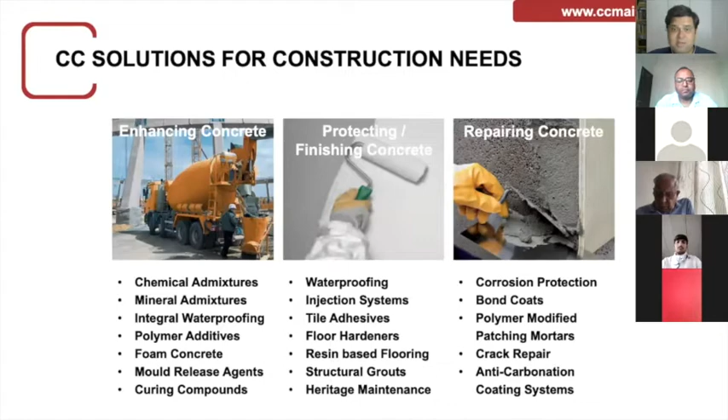As a construction chemical industry, most of you are well aware with us. We have a lot of different solutions in enhancing concrete, protecting concrete, finishing and repairing concrete, and so on—everything from admixtures to waterproofing systems, repair systems, corrosion protection, bond coats, grouts, tiling systems, you name it. Like we say, the aim is to make construction better.

Here are a couple of slides about our aims and objectives. What we are looking to do is basically address common issues relating to commerce and industry, especially relating to our industry. Education is one important part of it, along with promoting the growth of the CC industry, as well as providing a forum to communicate with different government bodies and other technical bodies such as BIS and other codal and professional bodies. This is all to make construction better.

We also work to organize workshops, conferences, and lectures, because knowledge sharing has to go on. The correct kind of training has to be imparted, with continuous education for both our customers and our members. So we look at both sides of information exchange over time.

Another key aspect is that we want to regulate the conduct and code of practice in the industry—basically increase the quality levels throughout the industry. These web talks would be one of our engaging mediums to do something like that.

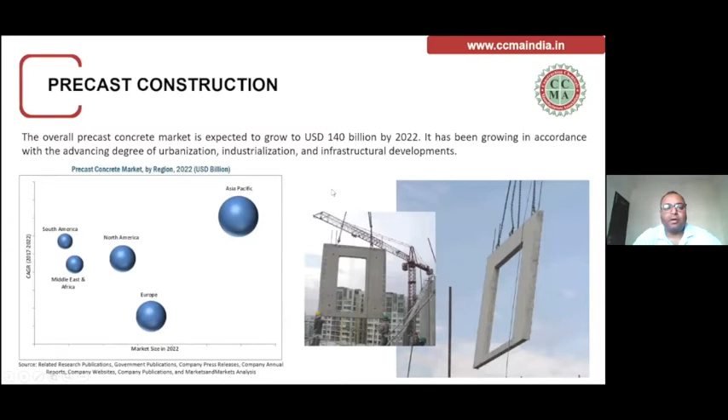For precast, we have a lot of construction going on, like building constructions, bridges, culverts, pipes, wind towers, various kinds of retaining walls, railway sleepers, tunnel linings like metros and all. You see a lot of tunnel linings are there. Various kinds of storage tanks are being constructed with precast. So precast is a big industry.

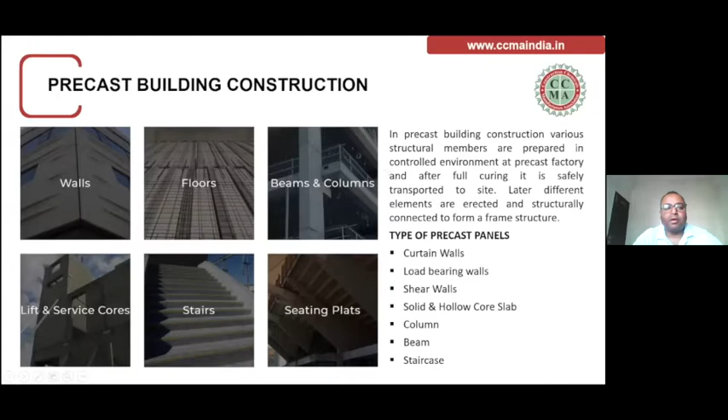We would be talking about building construction today and the grout requirements and sealant requirements. In precast construction, we have various members like walls, floors, columns and beams. These members are constructed in a factory, and then transported to the site location.

You can see these photographs, wherein these big panels are constructed in a very controlled environment in the factory, and then post construction or post curing, it is transported to the new site location.

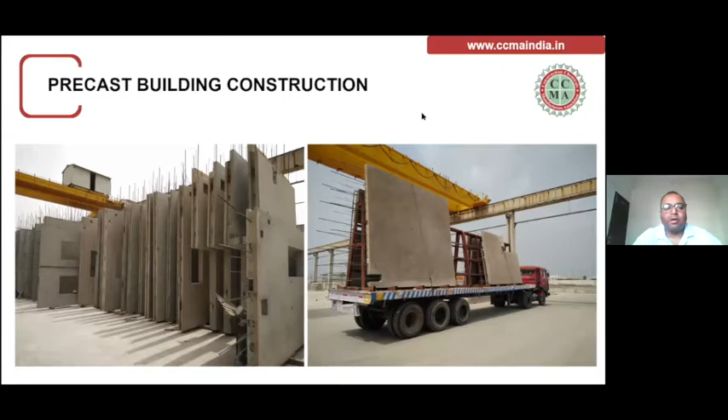At site, we have big capital equipment to handle these big panels, big cranes. Tower cranes are required, and skilled manpower is required for handling these panels and erecting them to the right locations. Once the panels are erected, a support function is provided, like bracings.

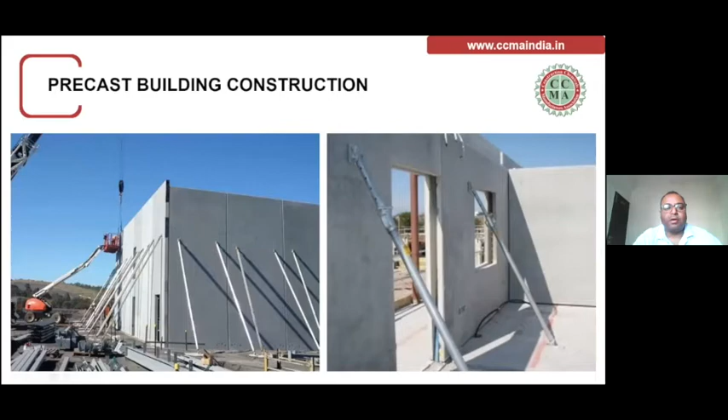And then you can see the joints. All the joints are connected together because all these panels are independent. They have been placed with the help of cranes. The bracing has been done so that they are in position until construction, and then the joints are fixed.

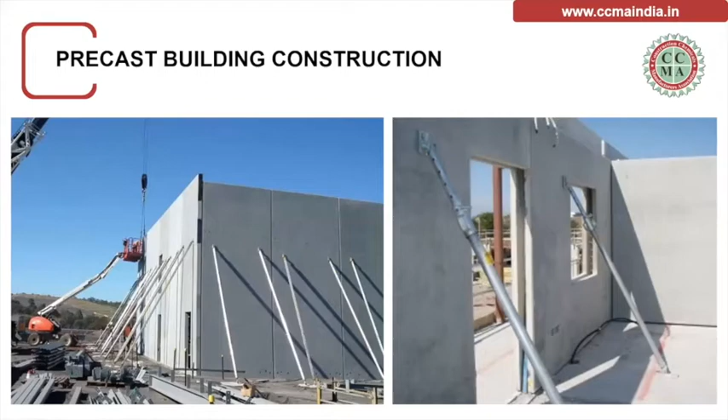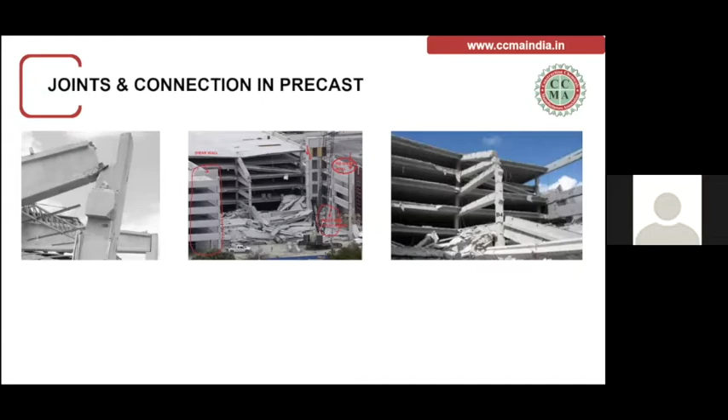There are various codes available. One of the codes is ACI 550, which provides the guide for emulating cast-in-place detailing for seismic design of precast concrete structures. This emulating detailing is basically defined as the connections between precast members, so that the structural performance of these joints is equivalent to conventionally designed cast-in-situ or monolithic structures.

This is very important, that these panels are erected separately but are connected, and the expectation from the joints is that they give similar or better performance compared to the cast-in-situ structure or monolithic concrete structure.

These connections between precast elements are done either by bolting, welding, or grouting, depending on the type of structure and criteria like seismic zones. It's important to understand that joints and connections are two different things in precast structures. Joints are basically the designed gap between the members.

The members are arranged so they are connected to each other, but the main function of joints is that one member should not transfer load to the other member. There is just a physical separation between the joints, created by sealants. But connections are designed to transmit force. For example, in a frame structure with column, beam, and slab, load transfers from slab to beam, beam to column, and column to foundation. These are load transfer members, and the joints between them are called connections.

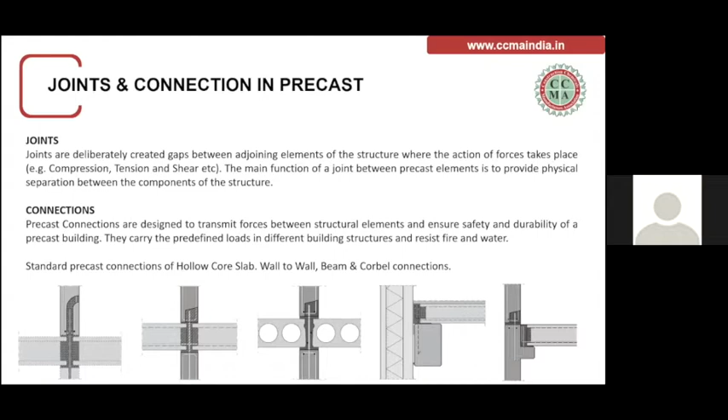There are various kinds of connections. For example, in the bottom sketch, the hollow core slab is connected to walls, beam, or corbel, and these connections are grouted at a later stage.

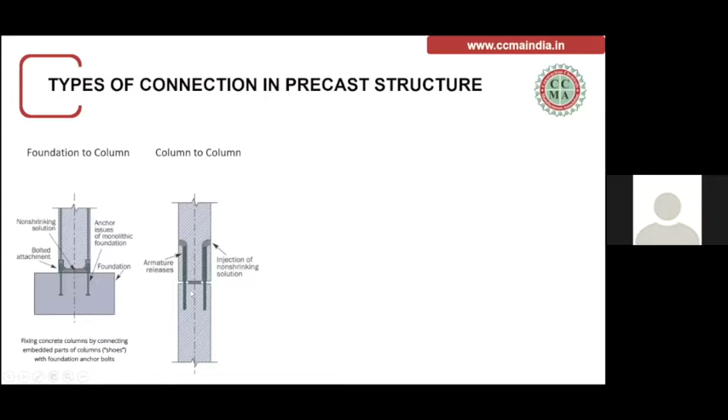These connections occur at many locations, like foundation to column. You can see the foundation here, and on top we have the precast column connected with non-shrink grout. Then column to column, where one column is erected and another is placed on top, with connecting rebars and preformed ports for injecting non-shrink grout. Similarly, there are column to beam connections, beam to slab connections, and slab to staircase connections. These are the various members in precast structures which are connected to each other, and we call them connections.

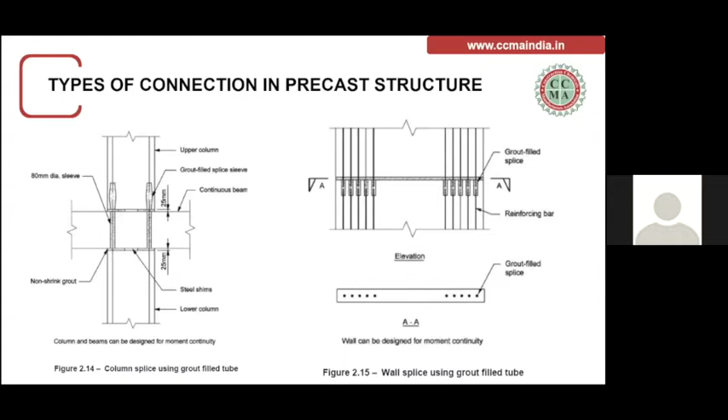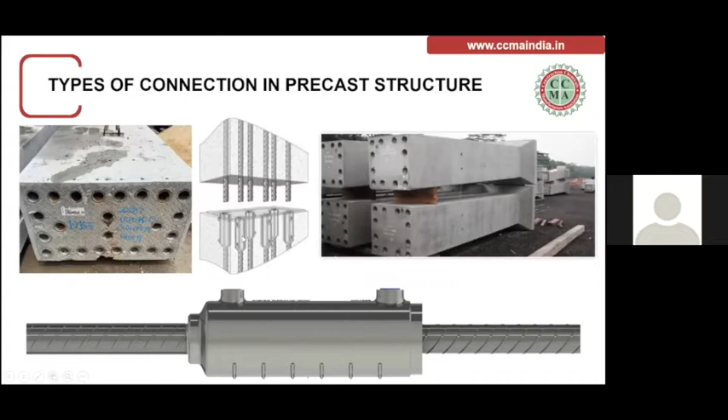To explain this, I have taken a small video which will give you a clear picture of how this works.

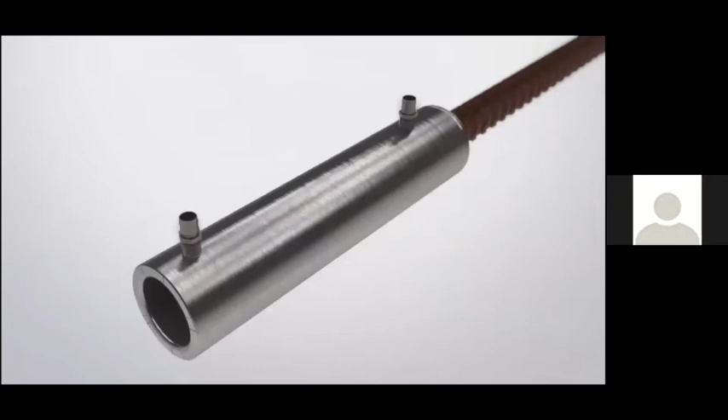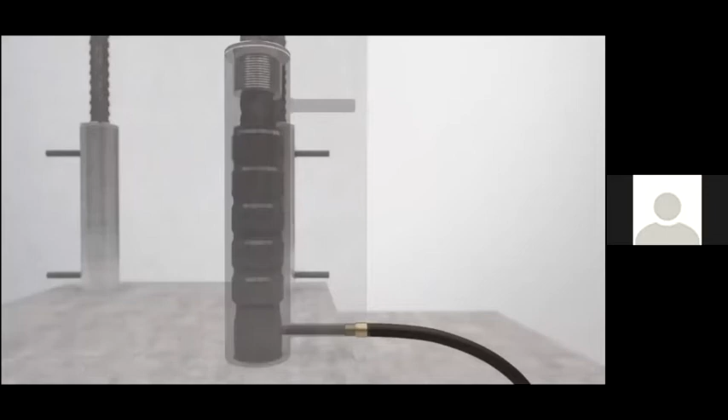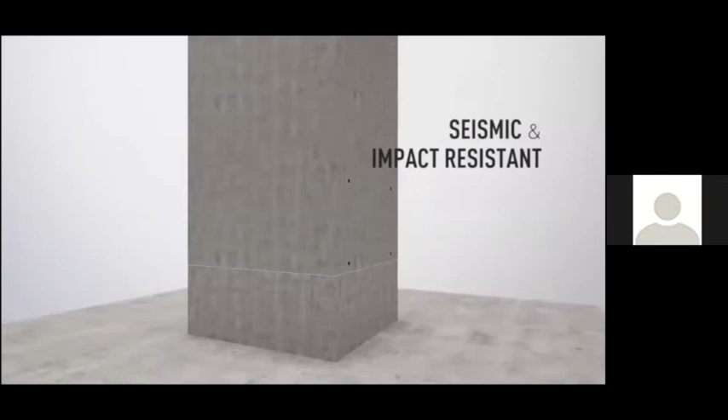You can see this mechanical connection where the rebar is connected, and these ports are pre-designed. When one panel is placed on another, these sleeves are filled with grout. The grout gets filled, and when it starts coming out from another port, we plug it. The sealing is done completely, and then the behavior becomes monolithic. These are special kinds of connections in precast members, now being used at various project sites.

So you have seen all the various kinds of joints and connections. Now let us understand what grout is. If you see ASTM-C 1107, it gives the definition of grouts, but broadly, you need to understand that grout is basically a load transfer material used to fill the gaps between connections, so that the end behavior emulates monolithic detailing.

It has to give the behavior of a monolithic structure, and these grouts are made with sand, cement, binder, and special additives which create various different kinds of grouts. At site, we mix water to get the desired flowable consistency.

ASTM-C 1107 has termed this as non-shrink, and therein there are three grades: Type A, which is expansion before hardening; Type B, which is expansion after hardening; and Type C, which is both expansion before hardening and after hardening.

This code also gives the performance parameters, the various test methods for the grouts, and the reporting, such as how the details of the grout should be captured.

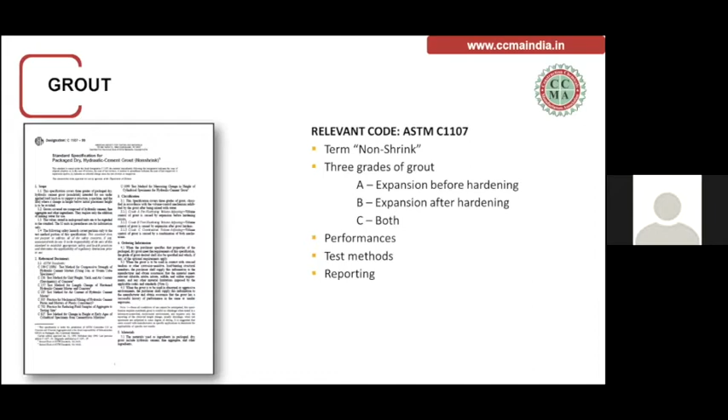Some properties of grouts are: first, it should be non-shrinkage in nature. The compressive strength should be high. It should be highly flowable, because you have seen all the connections where the grout has to flow. So flowability is one of the important parameters.

These connections are meant for the long duration, same as the life of the building or structure. So creep resistance is one of the important parameters of these grouts. The grout should be dimensionally stable, so that as the load increases, there should not be any dimensional instability in the grout. It should also have resistance to dynamic and seismic loading. These buildings are static in nature, but whenever there is seismic activity, expansion, contraction, or movement, dynamic forces are present. So the grout has to have resistance to dynamic and seismic loads.

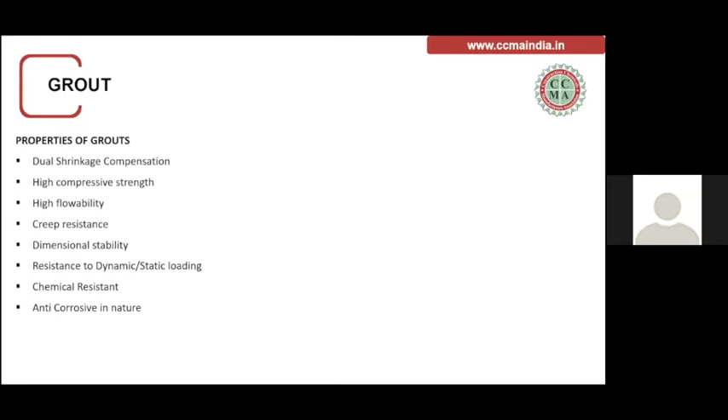Chemical resistance is one of the important parameters, so that the grout does not get damaged at a later stage because of chemical ingress in the structure, which we usually see at many project sites. Anti-corrosive nature is another important aspect, because the reinforcements embedded inside these grouts should not get corroded. So these are some of the properties of the grout material.

In general, we have seen a practice where we only look at compressive strength, but I would say that is not the right way of looking at grout. First, we have to understand the purpose of grout.

The grout first has to transfer the load, so it should have the ability to transfer the load, and second, it should completely fill the voids. The connections have to be completely filled. When we talk about load transfer, the effective bearing area should be high, because if the contact surface area is high, then only it would be able to transfer the load properly, and there should not be any kind of segregation or bleeding in the grout.

When we talk about filling the voids, once the void is filled, the grout has to give the performance of shrinkage compensation - expansion and compensation is one of the important parts of the grout, so that at a later stage, if there is any shrinkage, there would not be a void inside these connections. So the shrinkage should be as low as possible or minimal, so that no void is created at a later stage.

And the flow characteristic - because the grout has to flow from one point to another within the joints, and if the flow characteristic of the grout is not proper, possibly the grout will get blocked in between the connections. So these are some important parameters which we should definitely look into during the evaluation of grouts. When all these requirements are fulfilled by the grout, we can say that all the performance parameters are being achieved.

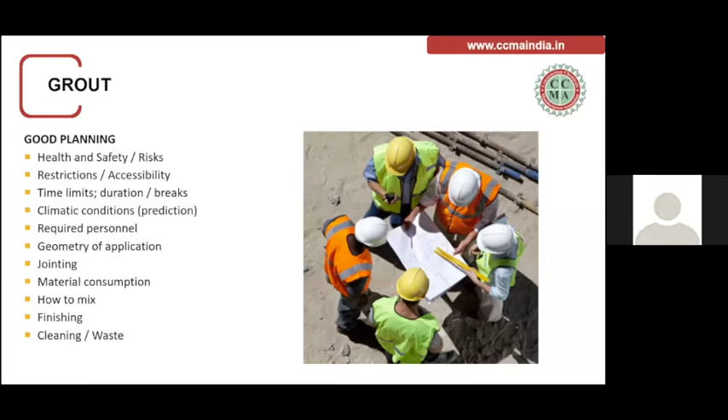Some application procedures: first, the substrate has to be prepared. In case of these precast panels, they are constructed at the factory and kept for a long duration for curing, then transported. So during this period, till the time the joints and connections are getting filled, the surface becomes absorbent.

So we have to ensure that these precast panels are in SSD condition during the grouting application, so that they do not suck water from the grout material. In case the surface is highly absorbent and water is getting sucked out, there would be problems at a later stage. So cleaning and pre-wetting is one of the important parts during the grouting application.

The formwork application has to be done properly. In the previous photographs, you have seen sleeves which are created for pouring grout. So when we are doing the pre-wetting, there are chances that there would be water inside these sleeves, and that has to be cleaned, because if some standing water is there and we pour grout, the end result would not be good. So excess water has to be removed. Mixing and pouring is another important aspect which we'll discuss later.

The curing part - the treated structure has to be covered or protected. The curing has to be done as per the recommendation, and definitely the finishing part. And all the documents like quality control records has to be taken.

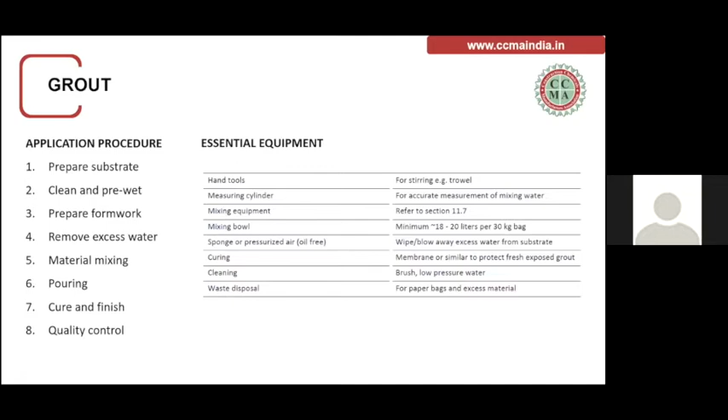For mixing, either the paddle spindle or the pan mixer should be used. It is very important that the mix consistency of the grout should be proper.

First, we should measure the water depending upon the recommendation from the manufacturer. About 80% of the required water should be kept inside the mixing jar or pan mixer. Then powder should be added to the water and mixing should be done. For the initial 1 or 2 minutes it should be mixed, and the remaining 20% water should be added after that. After complete mixing of 3 to 4 minutes, or depending upon recommendation, the mix consistency should be checked.

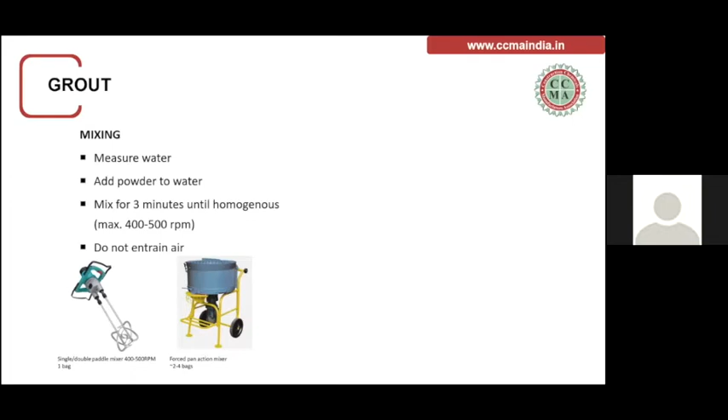Another important aspect - mixing should not be done at a very high RPM, because at high RPM there are chances that air gets entrapped. If the spindle is moving in an upward and downward direction, air can get entrapped in the grout, and air bubbles are not good for the grout consistency.

Some small pouring techniques - because these grouts have to flow, we should create a desired pressure head so that the grout flows with gravity and fills all the joints.

The compressive strength of grout is directly connected with the water-powder ratio. This chart shows that if the water-powder ratio is high, the compressive strength would be low. So it is inversely proportional.

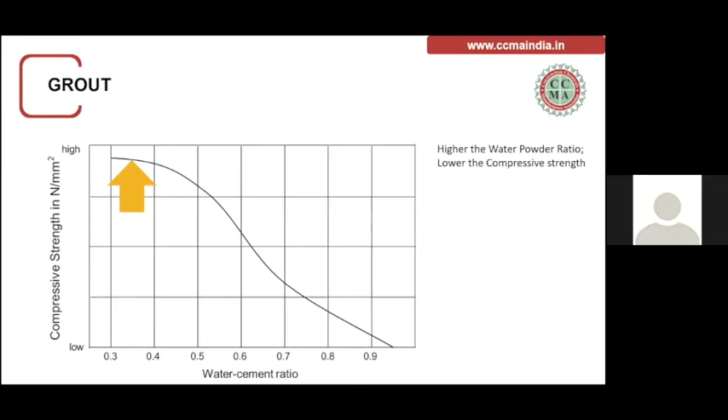We should always keep in mind that wherever we have to mix water, we should pre-measure it, and ensure that excess amount of water is not added, because if excess water is added, there is a possibility that the compressive strength of the grout will reduce and the end result would not be met.

Another important aspect is temperature influence, since this is an important parameter during grouting. We usually suggest grouting should be done when the temperature is low, either in the morning hours or in the evening time, especially during hot weather conditions. If the temperature is high, like 35 degrees or so, the initial strength gain would be high, but the final strength gain would be relatively low.

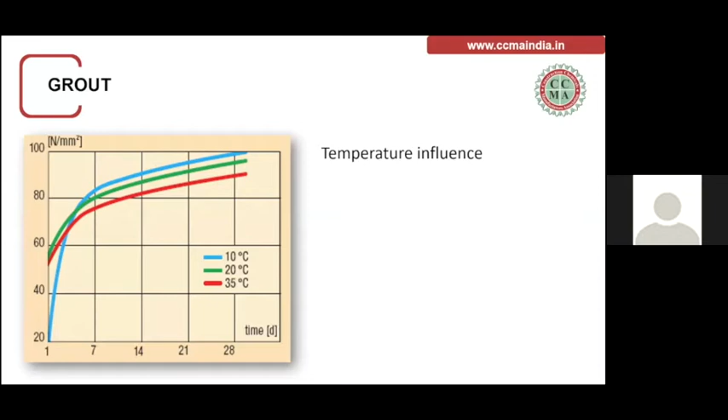So the ideal condition is to keep temperature as low as possible, so that the strength achievement over a period of time reaches the maximum level of the grout capacity. Temperature is one of the important aspects. The covering and curing of those joints is also very, very important.

Some on-site tests are required which we should definitely do whenever we do this kind of precast grouting. One is density, because these are tests which are possible at site. Segregation and bleeding is one of the major challenges.

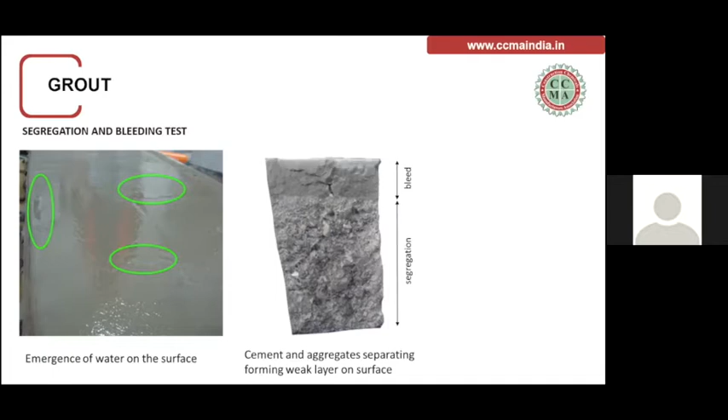You will have to see that when the grout is getting poured or applied, there should not be any kind of bleeding on the surface, because this will lead to segregation and then there would be a problem in the end result. This is one of the major challenges seen during grouting application - there should not be any kind of bleeding at site during application.

Flow is a very important aspect, especially for precast construction, because the flowability decides whether the grout has reached all the pockets or not.

At 10 minutes it should give 295 to 300, or slightly higher than 300. This cup cone has a size where the top is 50, the bottom is 100, and the height is 70. So the cup cone is filled on the glass plate, and then after some time it is taken off.

Then the spread is measured. So the initial 10-minute spread should be close to 300, and after 30 minutes it should slightly reduce, like 280 to 290. This flow should be achieved. In case the flow is not achieved, there are high chances that the grout would not flow properly and the joints would not get filled.

For measuring compressive strength or flexural strength, you can follow any code. EN 196 suggests a 40 by 40 by 160 prism, which can be used for checking compressive strength or flexural strength. Or we can follow ASTM-C 1107, which suggests casting a cube of 50 by 50 to measure compressive strength. These compressive strengths should be checked at 1 day, 7 days, 14 days, and 28 days.

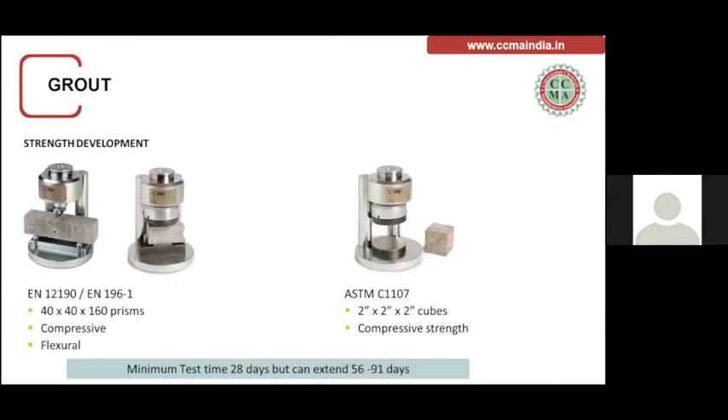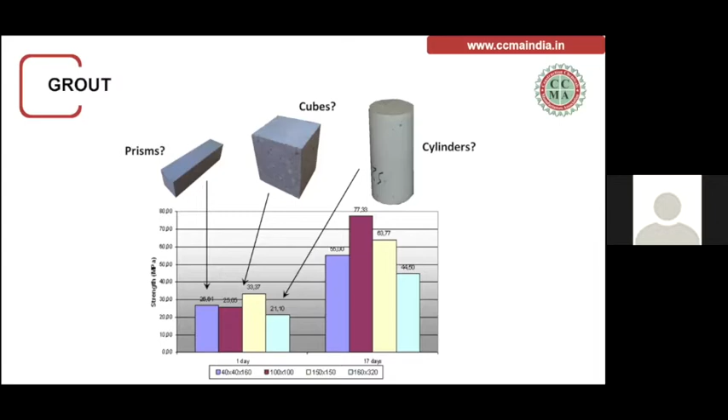Initially the result would be relatively low, but after 17 days the result would be very high. Similarly, with a 150 by 150 mold, the initial result would be slightly high, but at a later stage the strength gain is very high. So it is very important that we select the proper mold size, either 40 by 40 by 160 or a 50 cube, for checking the strength.

For calculations of the grout, when we start, we know the volume that needs to be filled, like 0.5 cubic meter or 1 cubic meter. So we need to calculate how much grout material is required so that, as I said initially, the grout pouring should be uninterrupted—there should not be any break in between the pouring. That much volume of grout material should be kept ready.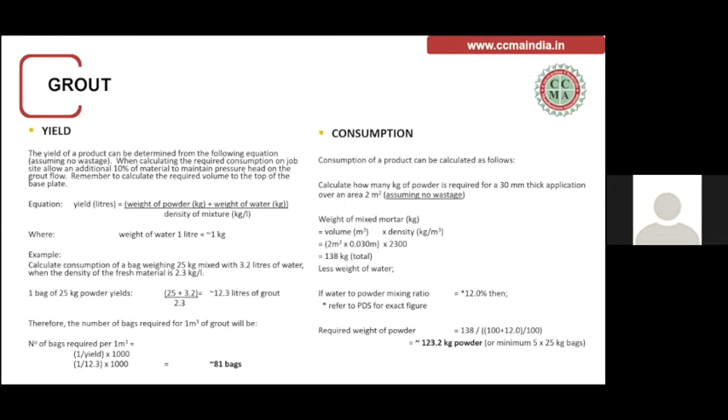Some basic calculations like yield calculation or consumption calculation, how much grout material would be required, should be done in advance, so that we have complete detail and the complete material at site for mixing and pouring. So this is all from my side on grouts.

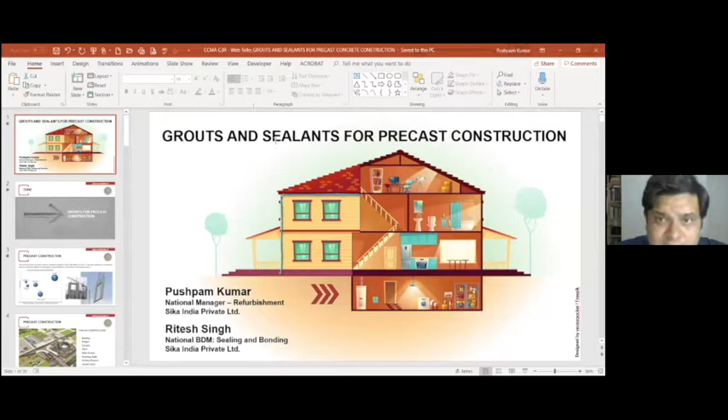My colleague Pushpam has spoken about the grout in precast joints, which helps in achieving the overall structural stability, integrity, and transmitting load. I'll be talking about the sealant in the precast joint, which helps in arresting leakages.

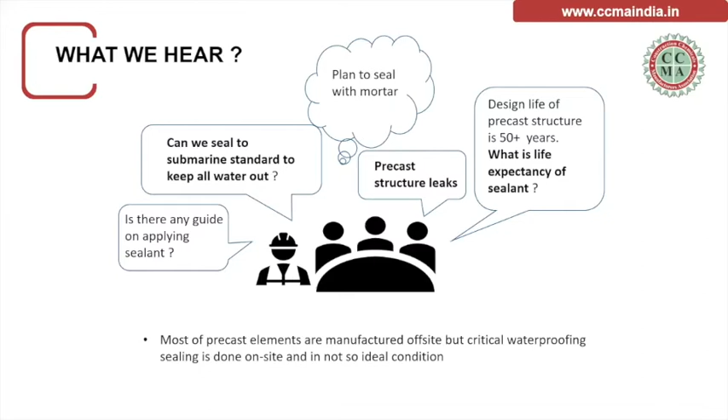We need to acknowledge the fact that most precast elements are manufactured off-site, but the critical waterproofing sealing is done on-site, and not in ideal conditions. The sealing is further aggravated if there is wrong joint design, wrong material selection, and wrong application.

Now, why joints in buildings? Simply, to allow movements. There would be movement due to thermal expansion.

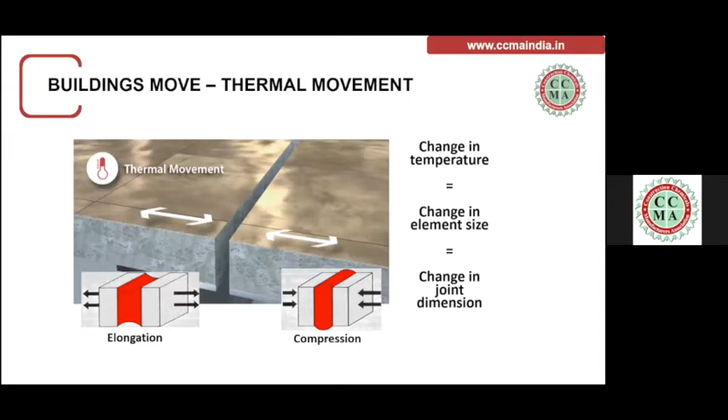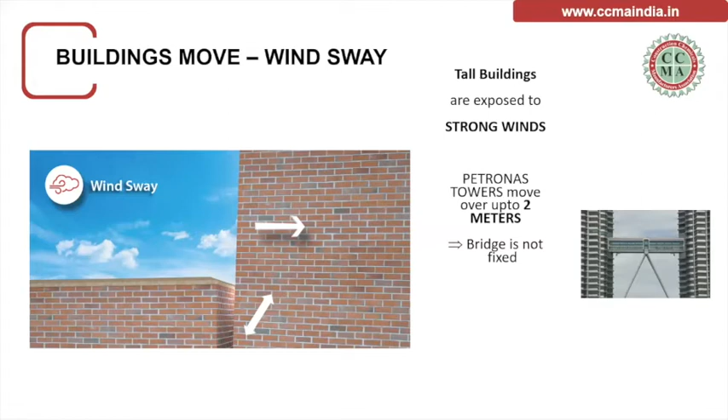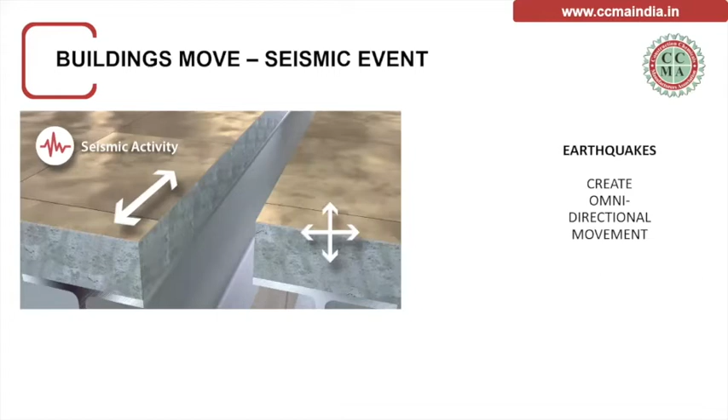I'll be playing a short clip showing the omnidirectional movement in the case of a seismic joint, and how the seismic joint minimizes damage to the joining structure.

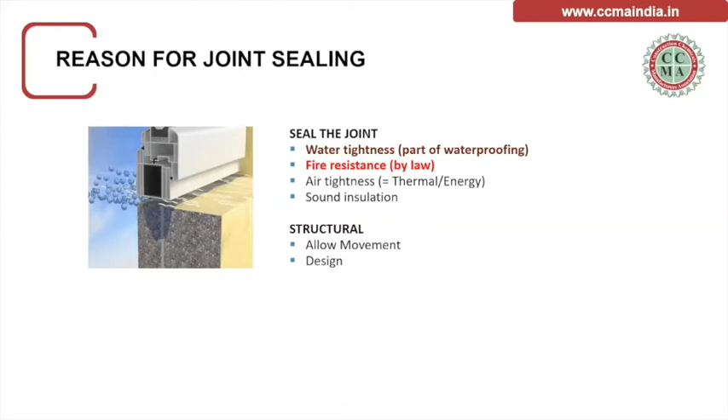The reason for joint sealing is to ensure watertightness as a part of waterproofing, then to ensure fire resistance that may be required by law, to have air tightness, energy saving, and sound insulation. The structural reason may be to allow movement and design.

Based on the function, broadly speaking, joints can be classified into two categories. First is movement and expansion joint, where high movements are expected, often across the same substrate, and typically between precast elements. The reinforcement does not pass over the movement joints.

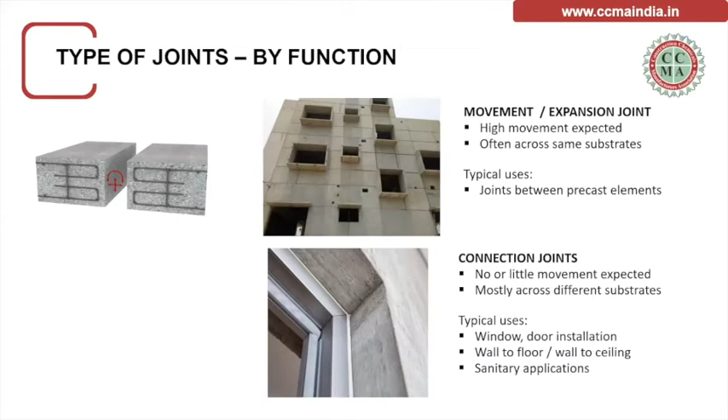Then you have connection joints where little or no movement is expected, and it is mostly across different substrates, typically between windows and the concrete panel, or wall to wall and wall to ceiling.

Now, to select the right sealant, we need to know the basics of sealant first. Material available for joint sealing can be classified into two categories: one is field molded sealant, and the other is preformed sealant.

In case of field molded sealant, you have a liquid or paste-like kind of material that goes into the joint, and it cures and then hardens. In case of preformed material, you have a solid material which is fitted into the joint or applied over the joint.

Further, this field-molded sealant can be classified into thermoplastic and thermosetting material. This classification is based on the behavior of a polymer when exposed to heat.

In case of thermoplastic material, when it cures, there is no cross-linking of polymer chain, and when exposed to heat, the material softens or melts, and in absence of heat, again it solidifies without changing its property.

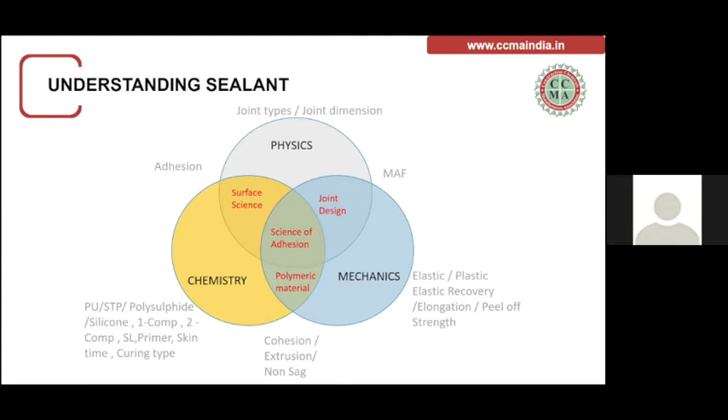To understand sealant would entail knowledge of multiple disciplines like chemistry, mechanics, and physics. Chemistry-wise, sealant can be PU, STP, polysulfide. For the mechanical part, one needs to know whether the sealant is elastic or plastic, based on its elastic recovery properties. With regard to physics, one needs to know about joint types. The intersection of these disciplines forms a sub-discipline covering joint design, science of adhesion, polymeric material, and surface science.

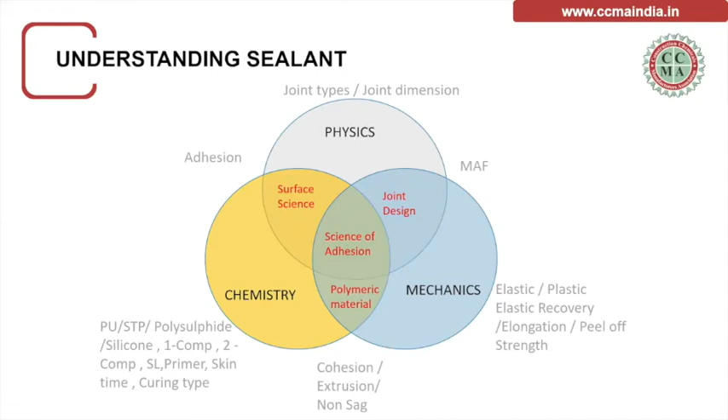The first step in joint design is to calculate the movement of the building element using the linear thermal expansion formula, which we have used in our school days, and is very simple. The change in length of a building element is directly proportional to the original length of the material and the change in temperature, with alpha as the coefficient of linear thermal expansion.

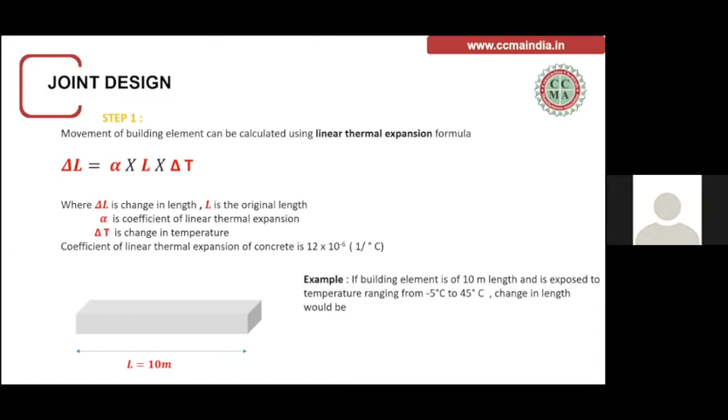So if the building element is of 10-meter length and is exposed to temperature ranging from -5 to 45 degrees Celsius, then the change in length or the movement across the joint would be around 6 mm, using the formula.

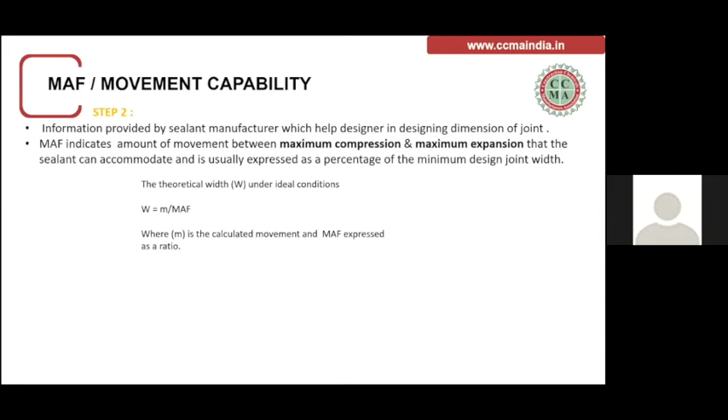The second step involved in joint design is to use the MAF, that is the movement accommodation factor or movement capability data. This information is provided by the sealant manufacturer, helping the designer in designing the dimension of the joint. MAF indicates the amount of movement between maximum compression and maximum expansion which the sealant can accommodate, and is expressed as a percentage of minimum design joint width.

This MAF is so important for joint design, you can think of it as equivalent to how important workability is in designing new concrete. Once you have MAF data, the theoretical design width formula is calculated movement divided by MAF. For example, if the calculated movement across a joint is 6 mm and MAF is plus minus 25, then the theoretical design width would be 24 mm.

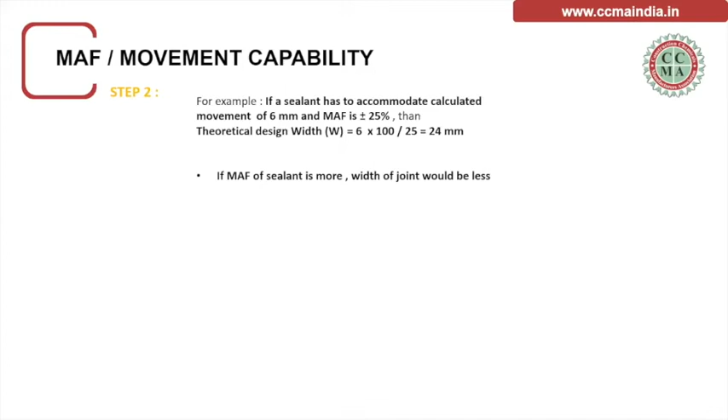Again, from the formula we understand, if the MAF of the sealant is more, the width of the joint would be less. But here, the specifier and designer need not always go for a sealant with higher MAF. This would reduce the margin of error and put undue pressure on the builder to work within the construction allowance.

Now, considering the same example above, if the specifier or designer, while designing the joint, has considered the MAF of plus minus 25, and at the site the contractor has applied a sealant having a lesser MAF, then it would lead to a failure, where you have a cohesive and adhesion failure.

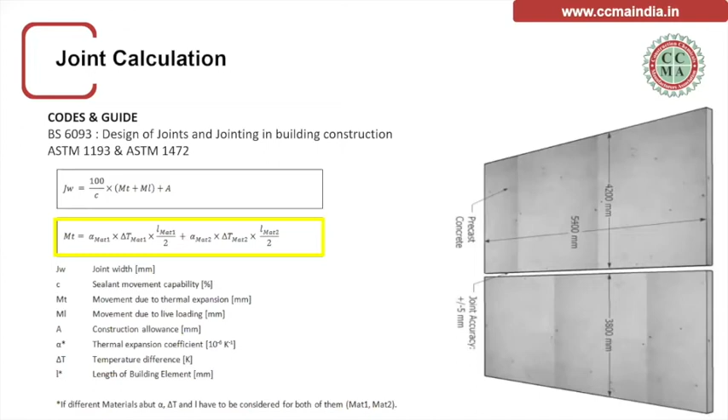Now, taking the input from the previous two slides, the joint between the precast elements can be calculated by first calculating the movement due to thermal expansion between the two panels, highlighted in the yellow box. After calculating this movement due to thermal expansion, we use the movement accommodation factor to calculate the design width.

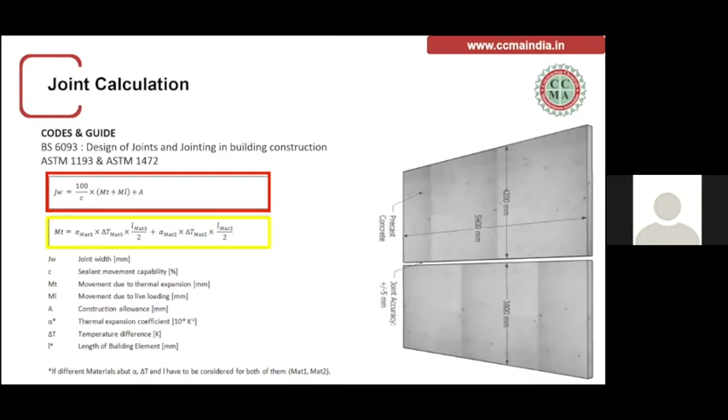Some qualitative considerations need to be given in designing a joint. One needs to ensure that the sealant is not pulled flush to the precast panel, because this would lead to faster deterioration due to high UV exposure. And joint width not being uniform would not look good aesthetically. The recessed seal gives proper protection from UV light.

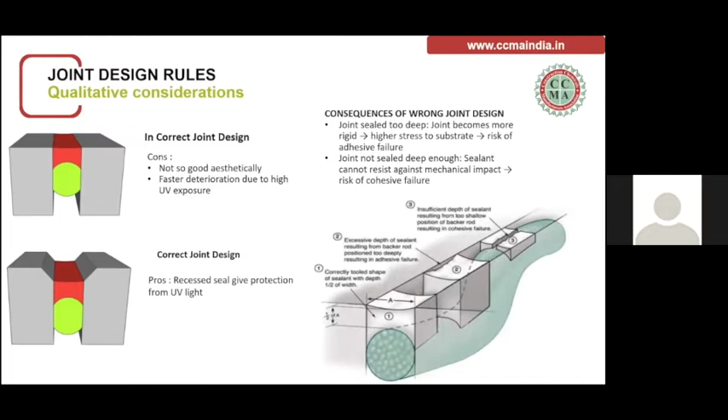The consequence of wrong joint design: if the sealant is too deep, then it becomes rigid and there would be high stress on the substrate, leading to adhesive failure. And in case the sealant is sealed very shallow, then there are chances of cohesive failure.

Next is understanding the importance of sealant geometry with regard to the performance of the sealant. In case the depth of sealant is twice the width, then the maximum strain is 94% for the extreme fiber in elongation, and it is around 250% for compression.

Now, if the depth of sealant is equal to the width, then the strain reduces to 62%. And when the depth is reduced to one half the width, strain is further reduced to 32%. So we can conclude that by reducing the depth, you are reducing the strain, and that is why the ideal ratio for sealing is 2:1.

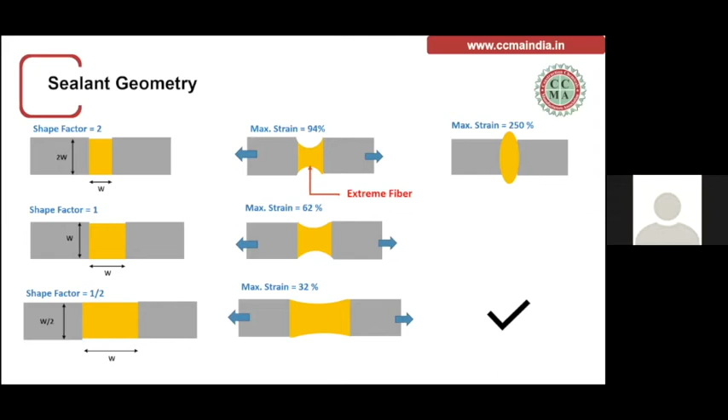Now, sealing the precast joint. Depending upon how the joints are sealed, precast joints can be classified into the following types. First is the face sealed one-stage joint. Very simple: the sealant is applied on the external side, and the sealing for both air and water penetration is provided by the sealant. The minimum gap should be 15 mm and the maximum should be 30 mm.

What are the advantages of this method? First is the lowest cost, and it is widely used for this reason. It can be readily inspected, repaired and replaced. It is best for low-rise construction. Panel edges can have a simple profile.

Disadvantages: it has to be applied with external scaffolding. Sealant is exposed to UV light, so there will be faster deterioration. Another important disadvantage is that pressure drop may occur across a one-stage joint during wind-driven rain in a storm, and water can seep through micro or hairline cracks.

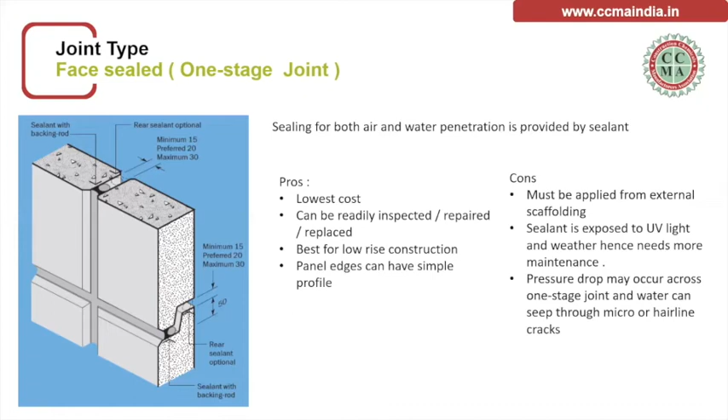Second type would be the face sealed two-stage joint. Here you have an extra line of defense, building redundancy into the system by providing sealing from the inside as well. On the outer side you have a primary sealant which is exposed and will deteriorate faster, and an inner secondary sealant which provides the air barrier and is not exposed to UV light.

The important thing to note in this type of sealing is there should be a weep opening in the outer seal. This would allow the pressure between the seals to equalize with the outside pressure. Drawback of this method: failure to provide a weep opening would result in water getting trapped between both seals, leading to faster deterioration.

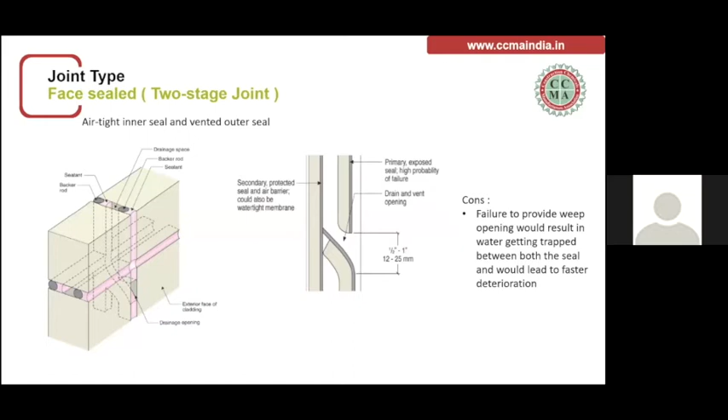Third type is the open drain joint. Here one provides a baffle, which may be made of neoprene or PVC, loosely fitted in the expansion chamber. When water hits the baffle, it drains over it. For the inside, you provide a sealant which also acts as an air barrier.

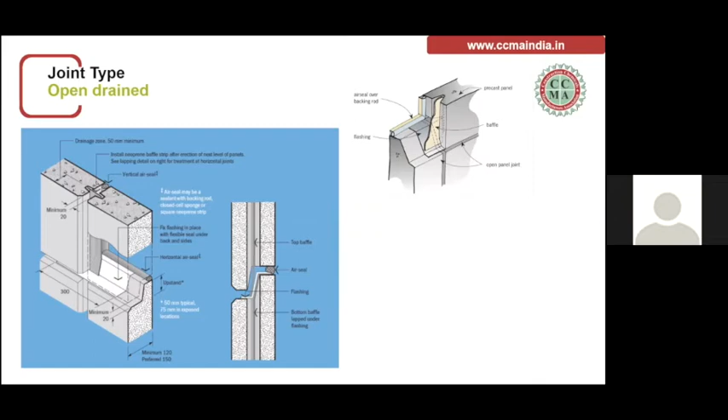Advantages: the rear sealant, applied from the interior, is protected from UV light. This can be installed from inside the building, and it's good for medium and high-rise buildings and can tolerate large movements. Disadvantages: skilled applicators are required for installation.

The last type is having a compression seal, where sealing for both air and water penetration is provided by preformed, pre-compressed polyethylene foam inserted into the joint. You can see the vertical and horizontal sections. Advantages: it's simple and quick to install, just like providing a gasket around the panel.

But drawbacks: maintaining compression on the seal at the intersection of vertical and horizontal joints is difficult. It cannot be fully waterproof, so it is limited to low-rise industrial buildings, because this polyethylene foam suffers from compression set and doesn't offer resiliency. That is why it cannot be fully waterproof.

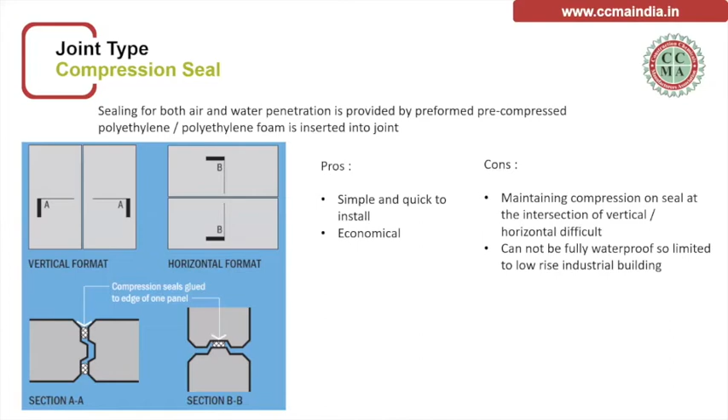Now, location of joints: one should not stagger vertical joints, as this would lead to staining and stress on the sealant.

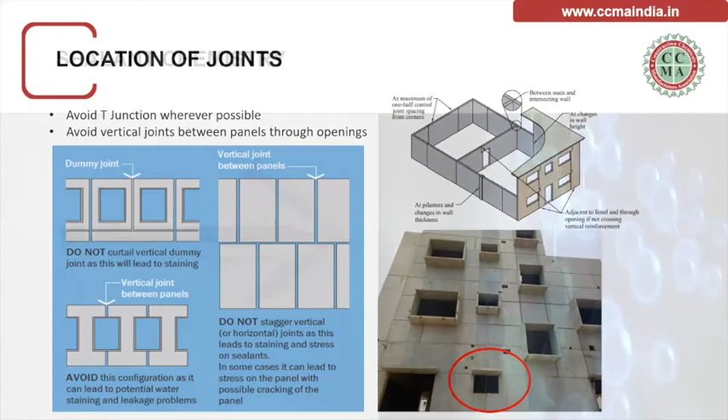Second, one needs to avoid vertical joints between panels through openings. You see it is encircled in red. This type of joint location should be avoided. Again, the joint needs to be provided when the wall thickness changes or where there is a change in height.

Now, how has this rating been given? If you look at the properties of these different chemistries, you'll find polyurethane having maximum movement capability, that is, having the highest percentage elongation compared to other chemistries. It has more elastic recovery, it can adhere to damp substrate, and it is paintable. Life expectancy one can expect is 10 to 20 years.

So in case someone is going for a modified mortar for filling a joint, one needs to know what to expect: there would be no movement across the joint. It would adhere well to the concrete, but it will surely fail in the short run.

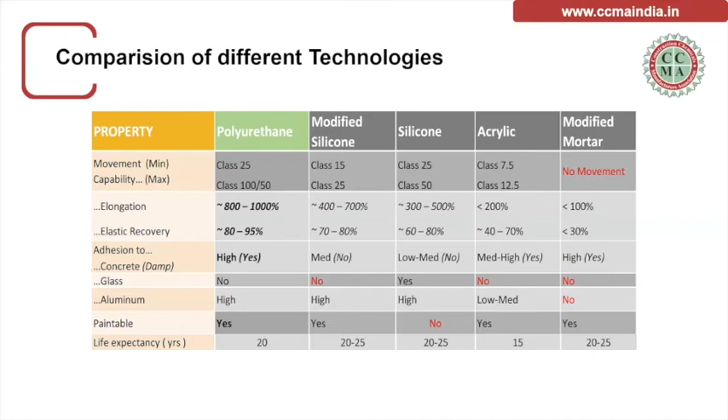The popular standards in the classification of sealant are ASTM C920, ISO 11600, and EN 15651. In these standards, there are a few important tests which are important from the specifier's point of view. First is ASTM C719 and ISO 7389.

Now, sealants are classified in ISO 11600 into two broad categories. Type F is for building construction sealant and type G is for glazing sealant. In building construction sealant, there are further 7 classes based on the movement capability of the sealant.

Based on elastic recovery, in case the elastic recovery of a sealant is less than 40%, it is notified as P, and it comes under plastic sealant. If the elastic recovery is more than 40%, it comes under elastic sealant.

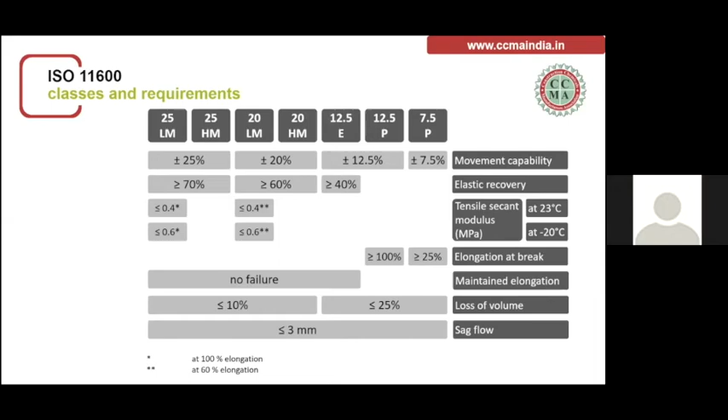The next important property one needs to look out for is tensile secant modulus, which would loosely equate with the hardness of the sealant when it cures. When the sealant temperature drops, the modulus of the sealant increases. So in case one is selecting a high modulus sealant for a substrate which is very weak, there is a high chance of failure due to adhesion.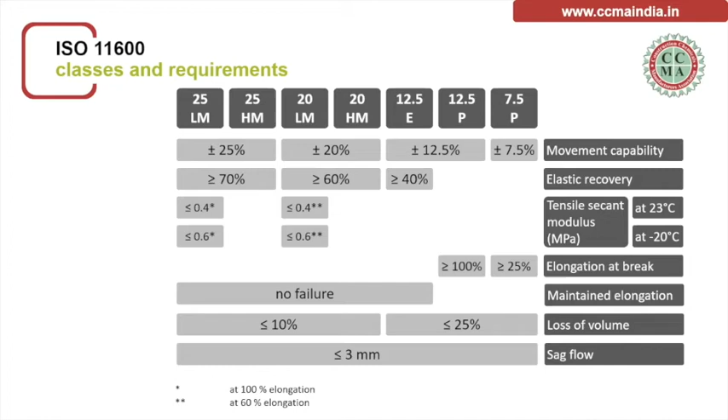As per ASTM standard, sealants are classified based on types, that is whether single or multiple component, grade, whether pourable or non-sag, and 5 classes based on movement accommodation factor or movement capability. Based on the use, a suffix is added to the sealant classification.

One of the important test methods in ASTM C920 is C719. This is an important test, and the specifier needs to appreciate the rigorous testing the sealant goes under: cyclic movement to evaluate the performance of the sealant.

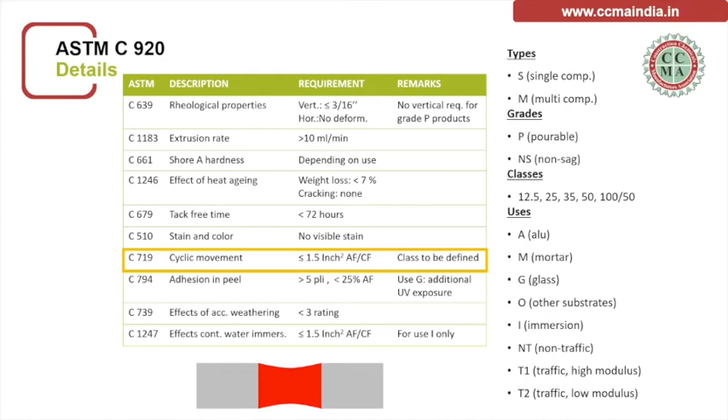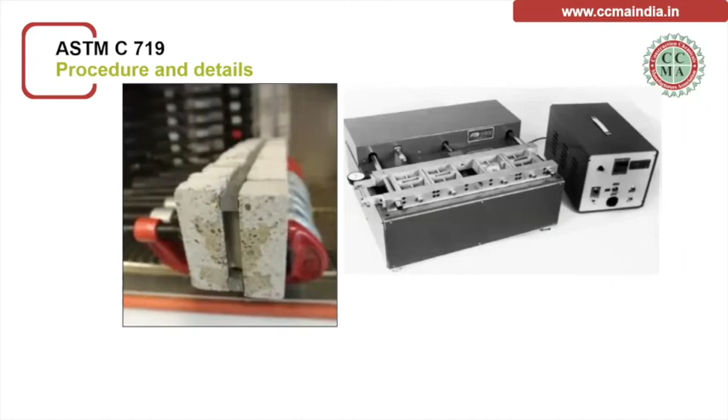So this is the apparatus for testing the sealant for cohesive and adhesion failure under cyclic movement according to the Hockman cycle. You have a C clamp and the compression extension testing machine with a console unit, and this test is performed in various scenarios.

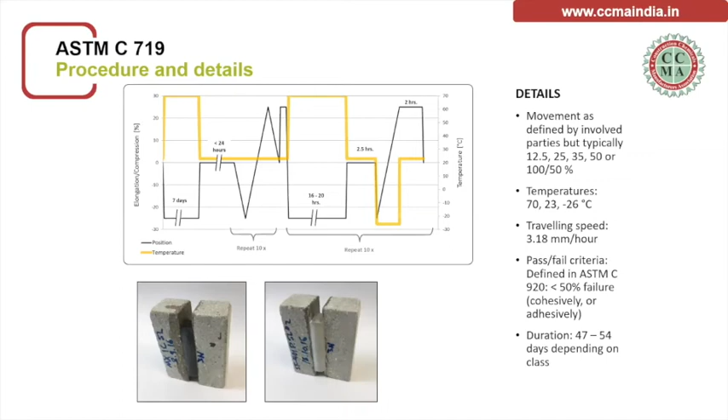It is extended to minus 25 to plus 25, and the temperature to which it is tested ranges from minus 26 degrees Celsius to 70 degrees Celsius. The traveling speed of the compression extension testing machine is 3.18 millimeter per hour, and the pass criteria is that there should be less than 50% failure. The duration of the test may take approximately around 2 months depending upon the class of sealant.

Now, what is the right application time for the sealant? If you consider a hypothetical scenario, the sealant is applied at a temperature of minus 29 degrees Celsius and the sealant width is W. When the temperature reaches 13 degrees Celsius, the gap has closed and the sealant width has reduced to 2/3. Further, when the temperature increases to 54 degrees Celsius, the width of the sealant reduces to 1/3. So the sealant is getting compressed by 66%, and there is a high probability of permanent deformation.

Another scenario: if the sealant is applied at very high temperature, at the time of application the width is W. When the temperature drops to 13 degrees Celsius, the width extends to twice, and when it further drops to minus 29 degrees Celsius, it has to extend by thrice the original width. So the sealant is extending by 200% in service, and there will be sure failure due to adhesion and cohesion.

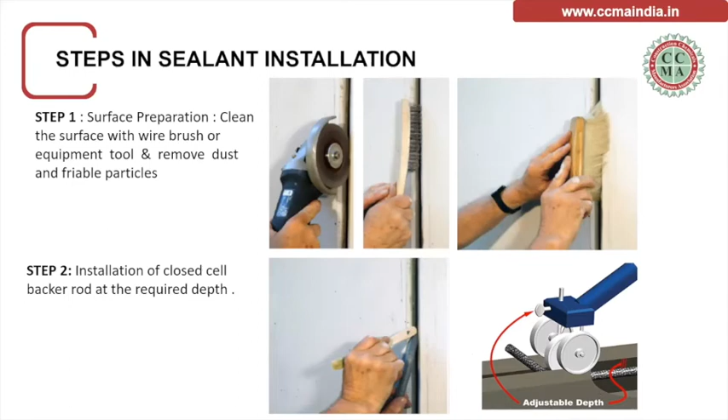Steps in sealant application are very simple. One needs to use a grinder and wire brush for surface preparation, install a closed cell backer rod, and use a backer rod tool to insert the backer rod. Then have a masking tape, apply a primer, and fill the joint, avoiding entrapment.

I'll be playing a video showing the installation and testing of a sealant at a site in India.

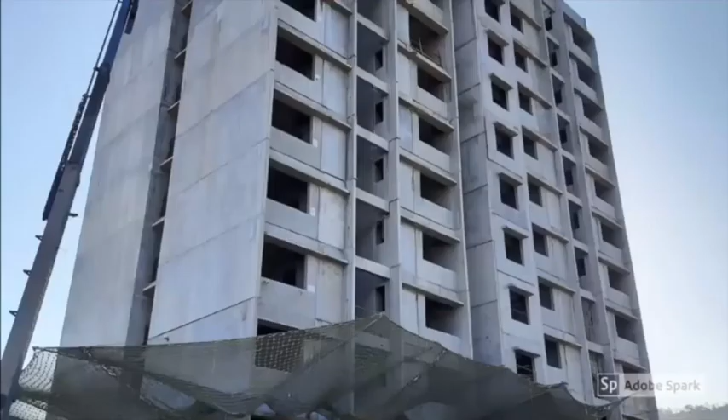It's better to use a power gun, a battery operated gun.

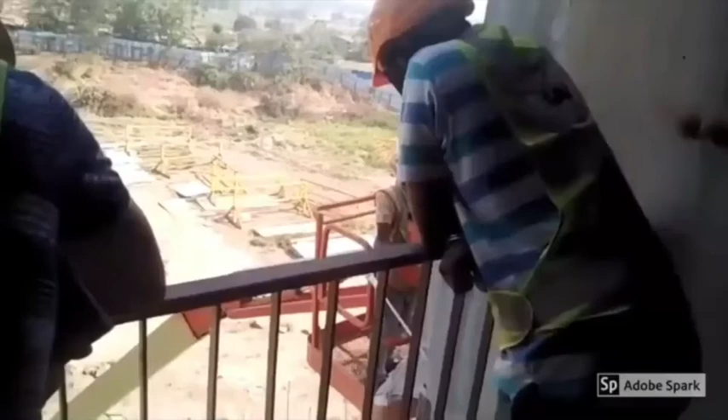You can see the engineers testing for water ingress from the inside when water is being sprayed on the precast panel slab.

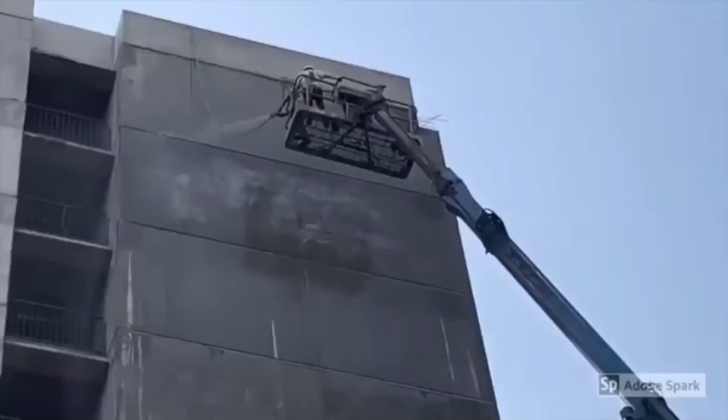This is a simple test which one can do at the site, but in case of a precast septic tank, one can go for a vacuum test and find whether there is a pressure drop.

Further, in a high-rise building, precast concrete panels can pose a serious safety hazard when fire occurs, which damages the panel connection. One can provide linear seal and penetration seal to have a fire compartment which will prevent the spread of fire and smoke in that area.

So linear seal can be provided between the doors and the concrete panels. It can be provided between the two panels from the inside. Then you have penetration seals. You can have fire resistant mortar, insulation board, and wraps and collars to create a fire compartment.

Now, as per the National Building Code of India, the fire rating of precast joint system shall be higher than or at least equal to the connecting member, and it should be approximately around 2 hours.

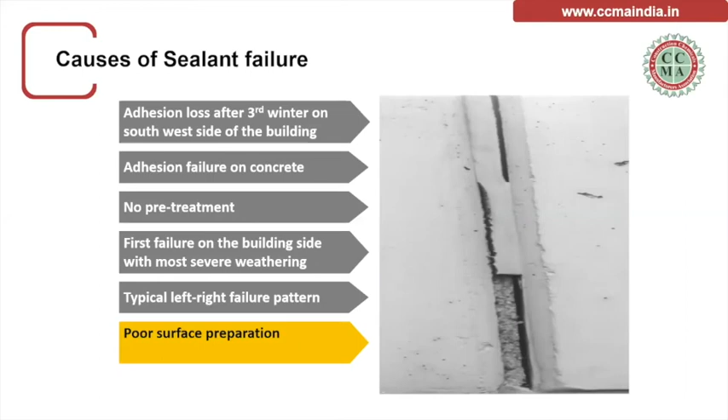So one needs to use a backer rod roller to insert the backer rod.

Another typical failure: you see the paint film getting cracked because the paint film won't have similar elongation compared to the sealant.

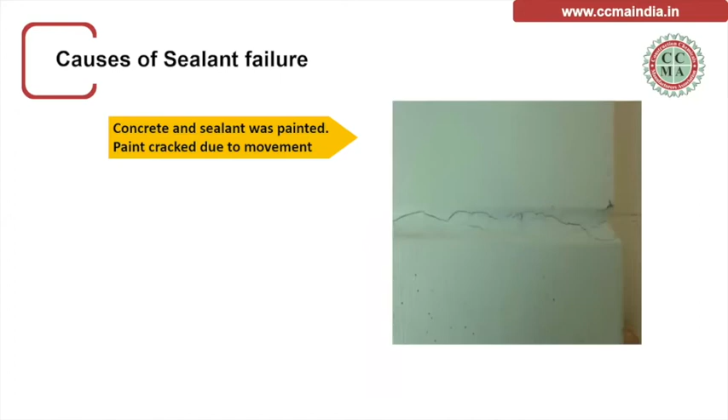And lastly, one of the most important maintenance items for precast panels is the sealant in the joints. The time frame for sealant and surface protection maintenance varies from 7 to 20 years.

So to avoid such kind of maintenance, one needs to properly design the joints, select the right material, and do the right application.